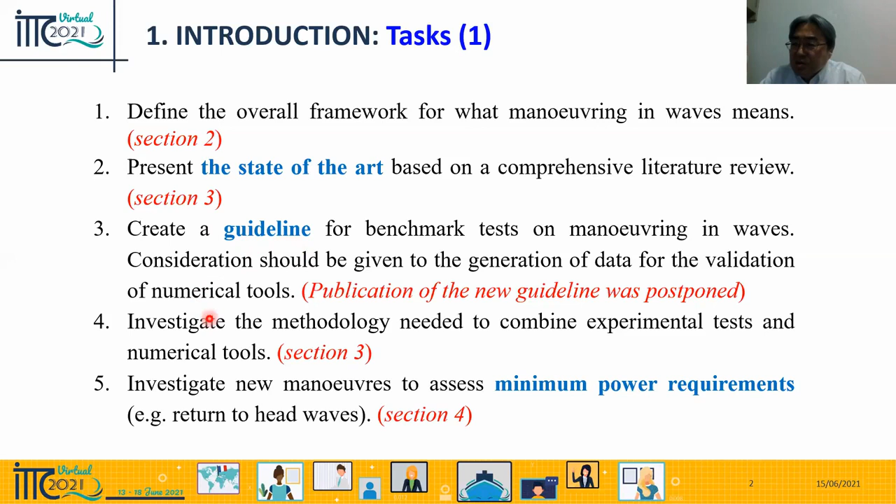This time I'd like to talk about some keywords. The second keyword is the state of the art, the third is guideline, and the fifth and sixth relate to finding the minimum power requirement. Tasks 7 and 8 are also related to the minimum power requirement. So this time I'd like to talk about the achievements on the task of minimum power requirement and some state of the art.

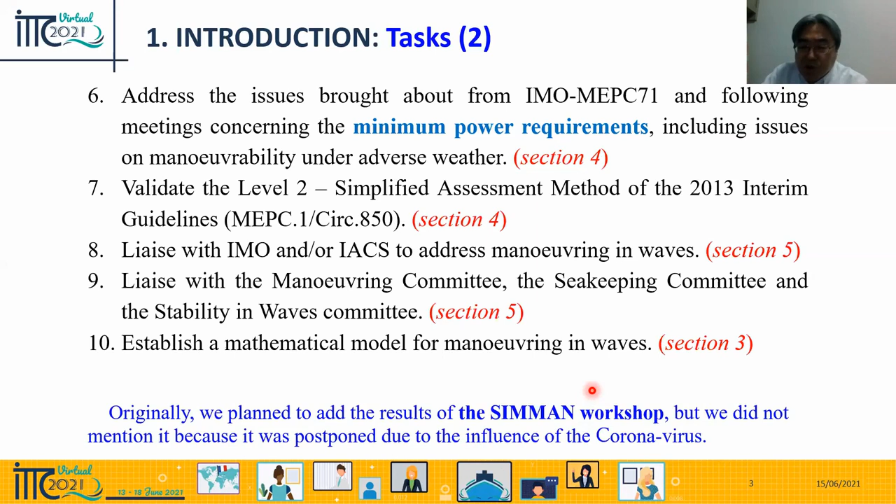Originally, we planned to add the results of the SIMMAN workshop, but we did not mention it because it was postponed due to the influence of the coronavirus. So this time my main topics are: state of the art, minimum engine power, and conclusion and recommendation.

Okay, the first one is the state of the art. In the report, we can find five subsections. First is the experimental method, second is numerical method, third is steady sailing performance and maneuvering limit in wind and waves, fourth is wave effect on ship maneuvering in shallow water, and fifth is additional aspects of maneuvering simulation in waves.

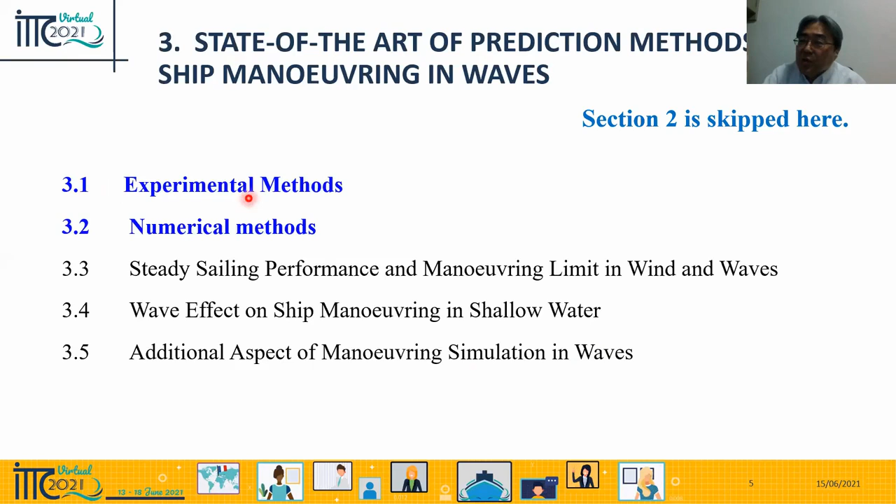Here I would like to introduce the first one, the experimental method, and the numerical method. In an experimental method, there are two types. One is a free running test in the waves. The other one is a captive test in the waves to capture the hydrodynamic force characteristics acting on the ship model.

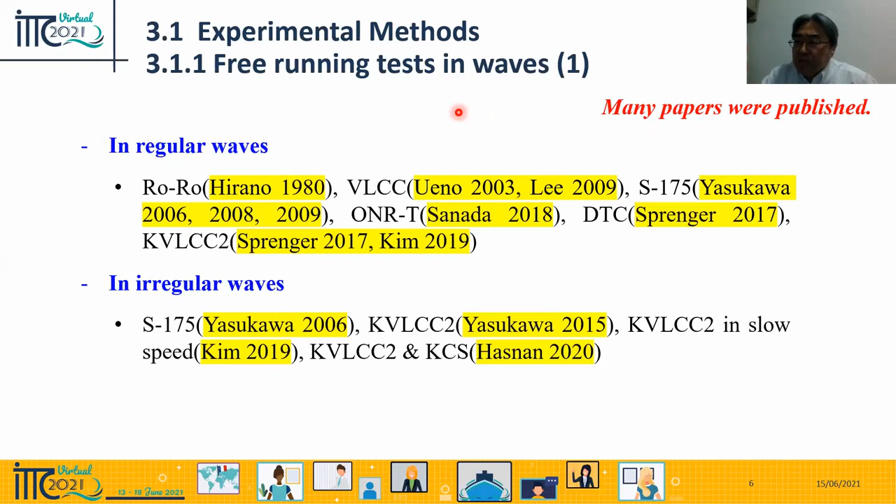Some ships published papers about the free running test in the waves, not only in regular waves but also in irregular waves. Nowadays many papers have been published. Here I would like to introduce a special technique for measurement of the ship position.

That is a total station system. The total station system is a fully wireless system for position measurement applying optical technique. You can see this is a photograph of the camera of the total station. The camera part is here, like the head of a human, and this one has one eye - this is the eye. Using this camera, the system always watches the target.

This target is the prism, installed on the ship model. The camera of the total station can track this target position automatically from the tank side. This drawing shows not a ship model but an actual boat - it shows the situation of measuring water depth in a river. Total station systems originally come from the civil engineering field.

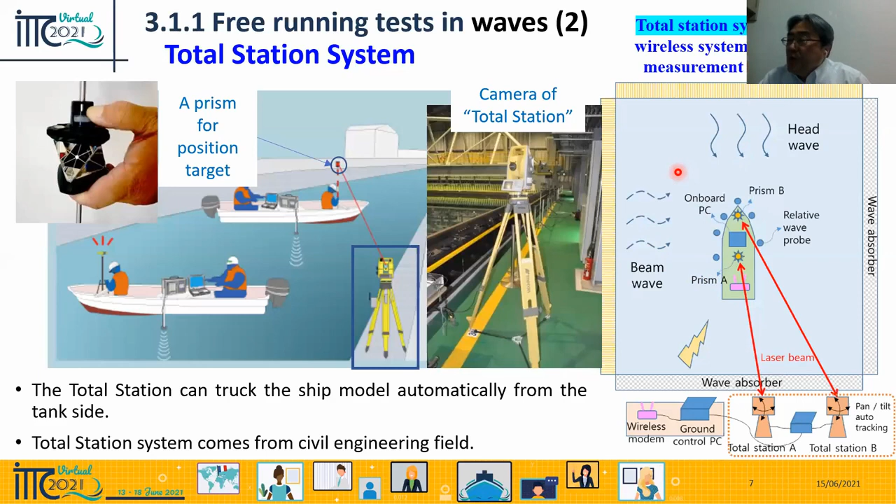This is a result showing the turning trajectories in regular waves. You can see many lines. The first one is turning with rudder angle 35 degrees, wave height is 2% of ship length, and wave direction is here, with the ship moving from here in this direction. This position is the 0,0 origin.

It just starts the steering, and at the same time the turning starts. This is the trajectory in calm water, reaching the steady state turning situation. Then wave comes here, so this is the trajectory in the waves - some deformation occurs, and you can see the ship moving here.

This is the trajectory in regular waves with lambda by L equal to 1.0, where lambda is the wave length and L is the ship length. The wave direction is here, but during the turning the drifting direction differs, so the directions are different. You can see the broken orange colored line. This is also the trajectory in case of lambda by L equal 0.7, and the green line shows the results for lambda by L equal 0.5.

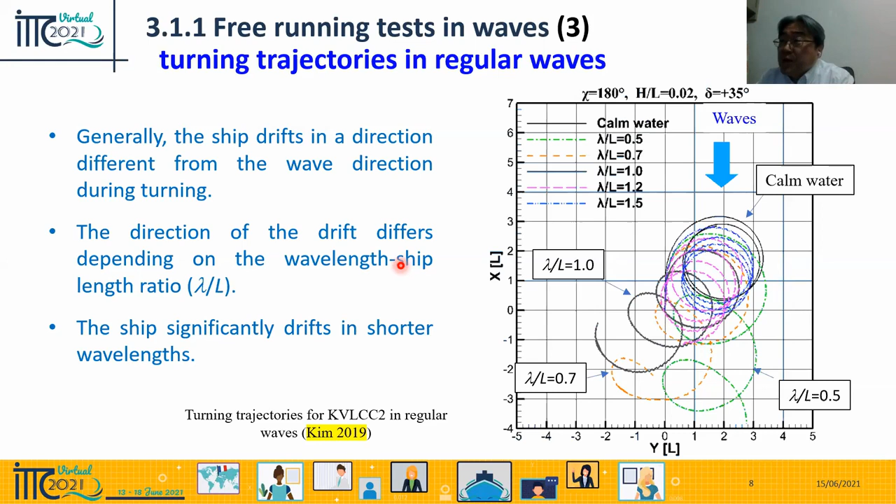Generally, the ship drifts in a direction different from the wave direction during turning. The direction of drift differs depending on the wave length to ship length ratio. Lambda by L of 1.0 is here, 0.7 is here, and 0.5 is here. The drifting direction is closer to the wave direction in shorter wave lengths, and the ship significantly drifts in shorter wave lengths. This drifting distance is quite large compared to the case of lambda by L of 1. This is a really typical characteristic of ship turning in waves.

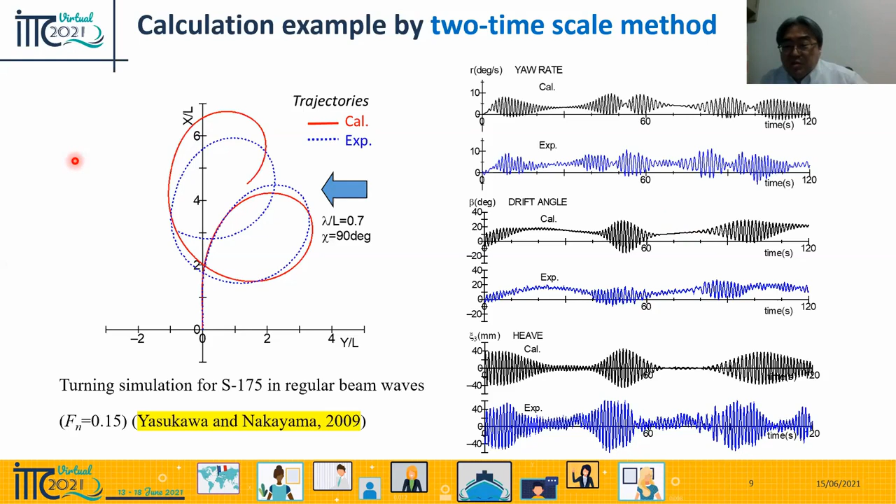Next, I would like to introduce the outline of the 2-time scale method. This method is really convenient, and the computational time is short while accuracy is not so bad. This method was presented by Skejic and Faltinsen in 2008, and at the same time Yasukawa and Nakayama also presented a similar approach.

In this method, total ship motion—meaning maneuvering in waves—is expressed as a combination of low frequency maneuvering motion and high frequency wave-induced motion. These two models, low frequency motion and high frequency motion, are separately solved. For the low frequency maneuvering model, we use the MMG maneuvering model with mean wave forces. For the seakeeping model, we normally use the time domain strip method or time domain 3D panel method. The two models are solved separately, but information exchange is really important between the low frequency and high frequency models.

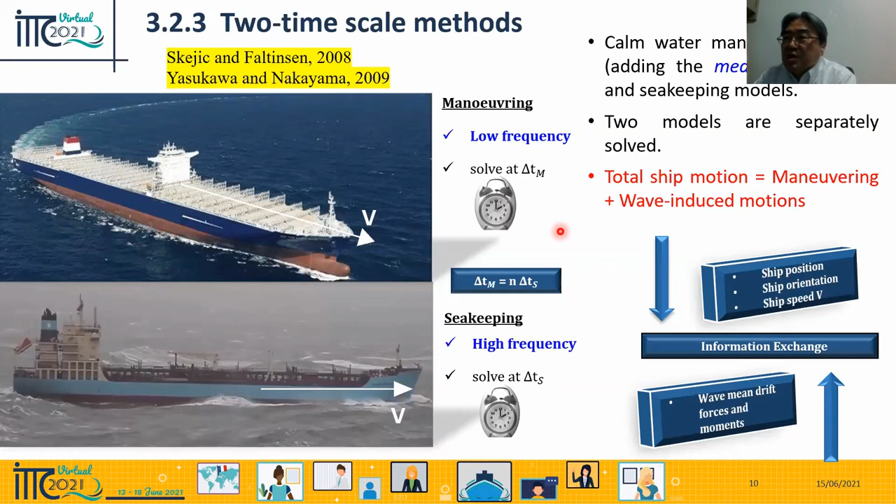Next, let's move to the experimental method. This time I would like to introduce the wave-induced motion and mean wave forces of a ship moving obliquely in regular waves. The important point is that the ship is moving obliquely—if the ship moves straight, that's the usual seakeeping problem. This experiment was conducted by Yasukawa and Adnun in 2006. I'd like to introduce some results about the wave-induced motions: heave, pitch, sway, and roll.

In the head wave case, heave and pitch at 0 degrees are completely the same as the usual seakeeping problem, with the horizontal axis being lambda by L for regular wave cases. Taking drift angles of 5 degrees and 10 degrees, this drift angle effect is not so remarkable in heave and pitch. But in sway and roll, at 0 drift angle the amplitude should be 0, and in the experiments it's almost 0. But taking drift angles of 5 to 10 degrees, sway and roll—such lateral motion—appears.

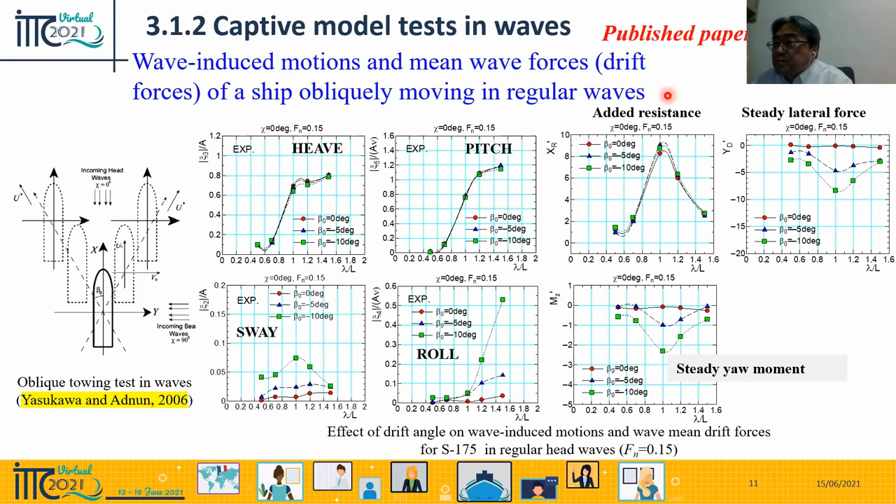So this time I introduced the two-time scale method, but this method is based on linear theory, meaning the wave height is small. Nowadays, however, CFD has become a really powerful tool for simulating everything.

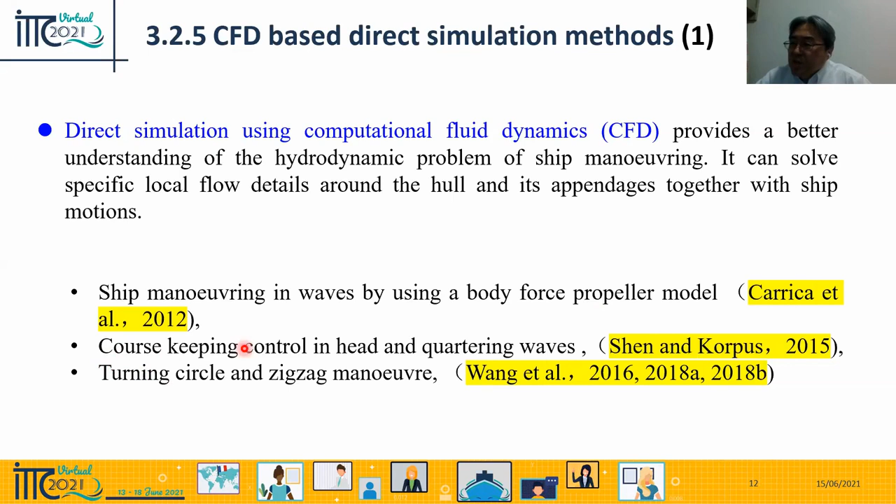For maneuvering in waves cases, CFD is really important, and direct simulation using CFD is really promising. In 2012, some simulations were carried out, and now this is being extended to problems of course keeping control, turning circle, and zigzag maneuvers. This is the result from Wang et al.

This 2018 result is a simulation of turning in regular waves. We can clearly capture the free surface elevation during turning here, and at the same time check the vortical structure around the ship during the turning. I think this method is really promising for the near future.

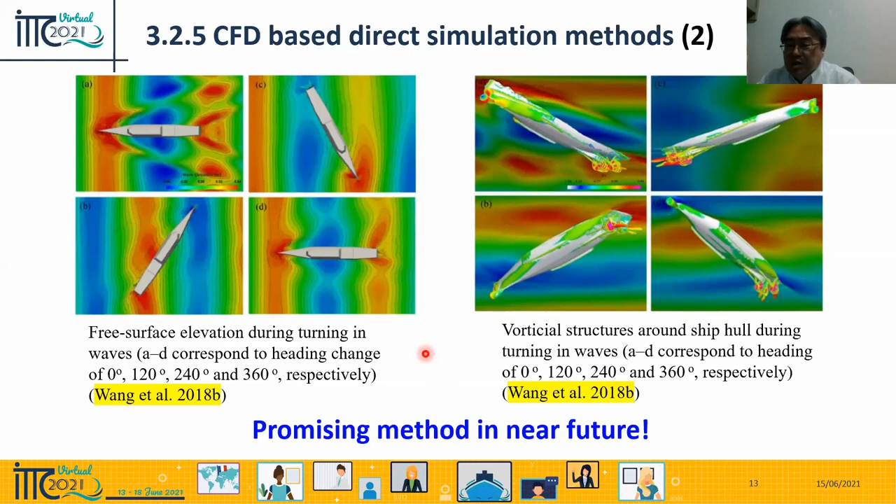Okay, next move to the minimum power requirement problem.

Background: IMO adopted the Energy Efficiency Design Index for new ships to reduce shipping greenhouse gas emissions via improved ship design and operation. There was a concern that one of the most effective ways of reducing the EEDI is simply by choosing a smaller main engine, thus reducing the ship's design speed. Within IMO, a debate took place on how far speed reduction could be used to attain a low level of EEDI. As a result, it was decided to limit the use of this method so that it does not lead to unsafe and underpowered ships that may lose maneuvering capability under adverse weather conditions.

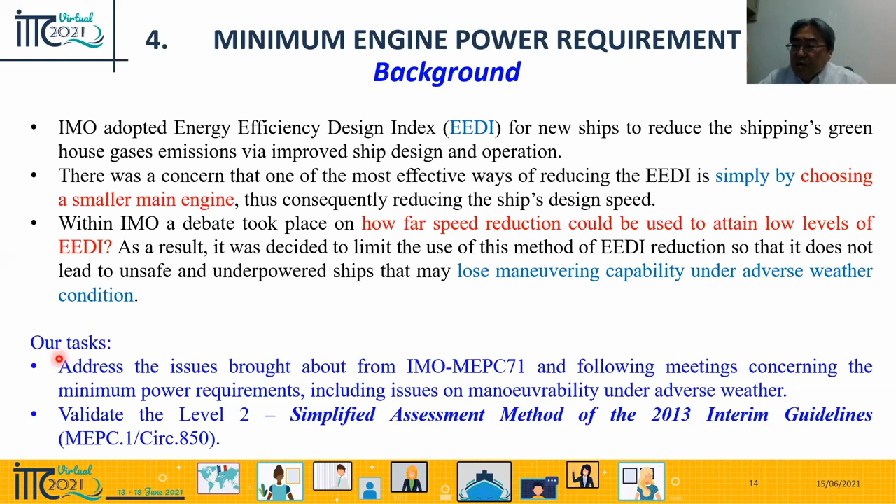Under that background, we were given this task. So in this I will introduce some results, but unfortunately there's not enough time, so I'll just mention the problem.

Revision of the 2013 interim guideline: for determining minimum propulsion power, there are two methods. One is Level 1, using a really simple formula. The other is Level 2, sometimes called the simplified assessment. This Level 2 method is really important now.

The name includes the word 'simplified,' but it's not so simple, because first we have to define the adverse weather condition and also define the advance speed. After defining that condition, we have to calculate the resistance — calm water resistance, aerodynamic resistance, added resistance in waves, and appendage resistance. After fixing the resistance, based on such data, we can calculate the engine power.

Then there's the required advance coefficient. If we want the advance coefficient, we need self-propulsion factors — thrust deduction, wake fraction. Using such data, we can calculate the power.

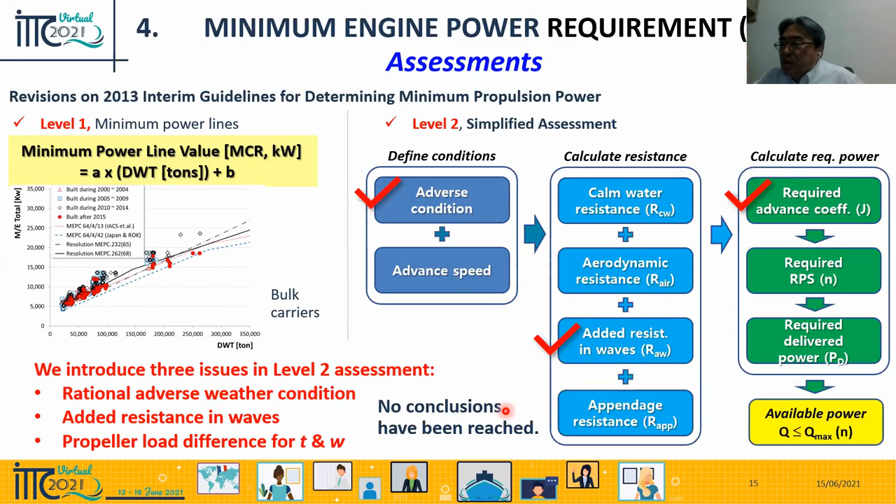Then there's the self-propulsion factor — how should we determine it? There is this kind of problem, but at present no conclusion has been reached.

Unfortunately time is limited, so just to show the slide about prediction methods of ship maneuvering in waves: we should move to more experiments and calculations in irregular waves with large wave height. Direct ship simulation is promising, but direct maneuvering simulation in irregular waves is still a challenging problem.

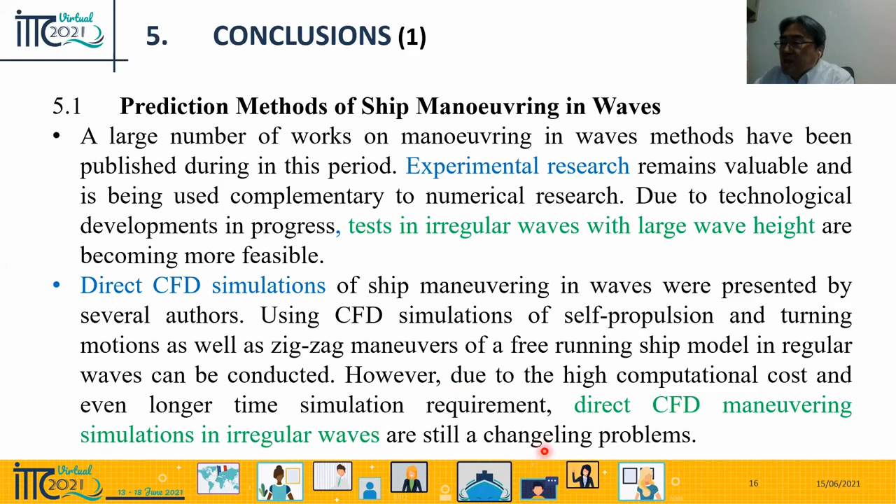Minimum engine power requirement discussion is continuing in IMO. The recommendation is to improve the numerical method; we need better understanding of the mean wave drift forces.

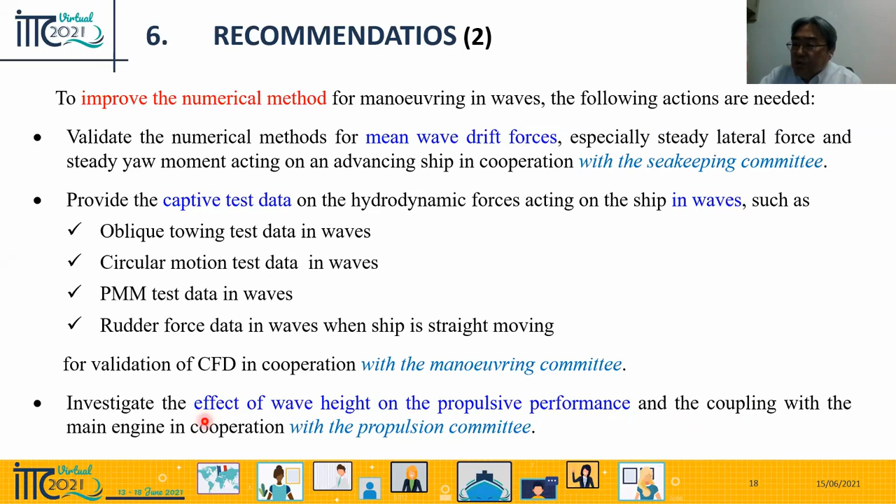Cooperation with the seakeeping committee is really important. We should provide captive test data for validation with CFD, such as oblique towing tests in waves, circular motion tests in waves, PMM tests in waves, and so on. We should also investigate the effect of wave height on the propulsive performance, coupled with the main engine, in cooperation with the propulsion committee.

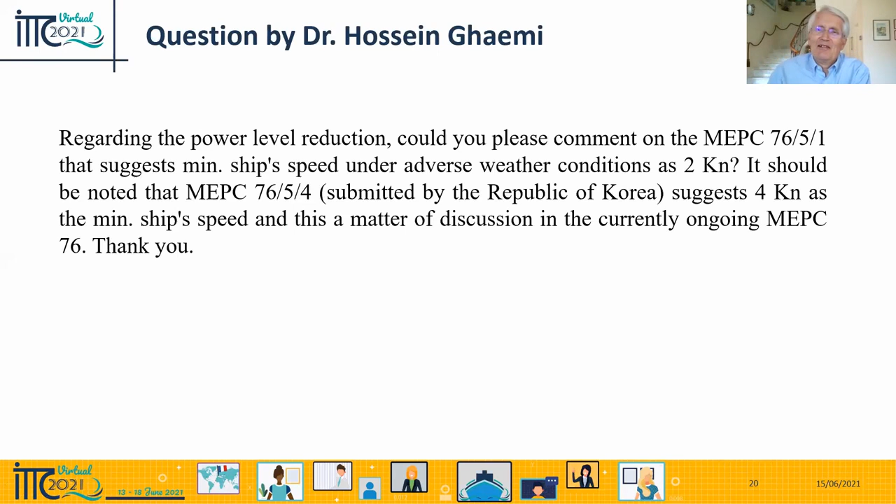There's one question that came up earlier from Hossein Ghaemi regarding the power level reduction. Could you please comment on the MEPC submission that suggests the speed under adverse weather conditions at 2 knots? There is also a submission from Korea suggesting 4 knots as a minimum ship speed. This discussion is currently ongoing in MEPC, but according to my experience, it could be 0 even in adverse conditions. But for calculation, you have to define something. So what do you say to that?

Okay, thank you for the discussion. In MEPC 76/5/1, the revised draft guidelines were discussed under reinforced adverse weather criteria — wave height 6 meters, wind velocity 22.6 meters per second, with a ship speed of 2 knots proposed. However, the UK and the Republic of Korea prefer the more conservative approach of a ship speed of 4 knots on this issue.

In MEPC 76/5/4, Korea concluded that when the revised draft guidelines are used, a lower required minimum power could be derived, as shown in Figure 1. This figure shows the change in required propulsion power.

So this bar graph shows the results using the 2 knot case. The order of magnitude is slightly different because the self-propulsion factor is different. This result is for 4 knot. In the case of 4 knot, minimum power is increasing, meaning there exists a bigger margin in the engine. In the case of 2 knot, the minimum power should be smaller.

In view of safe ship navigation, a larger minimum power is better, so in that opinion 4 knot may be better. But in view of reducing CO2, a smaller engine is better, in which case we should choose 2 knot.

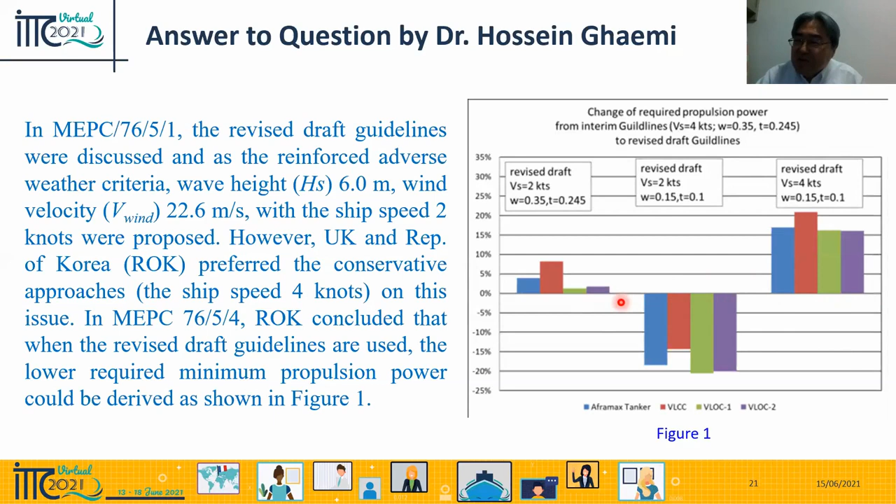So this suitable line is very difficult to determine. The ship speed under the adverse weather condition, whether 2 or 4 knot, is not fixed yet. It is scheduled to be discussed at the ongoing MEPC meeting.

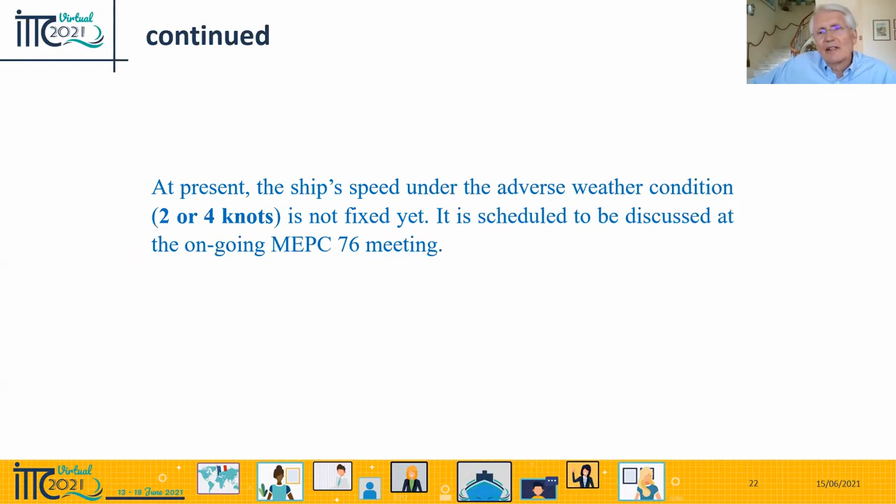That's a conventional maneuvering model such as Abkowitz or MMG models are for calm water assumption. Most of the existing models are based on such models and extended to waves by adding second order mean drift force and moments, as you showed in your presentation, due to waves. He would like to ask you how accurate you think such an approach is. That's one question. And do you think it's possible to develop a more thorough mathematical model, including wave and seakeeping components in the maneuvering model?

Okay, thank you. Low frequency maneuvering in waves can be predicted with practical accuracy by a simple treatment: adding the second order drift forces acting on the ship to the maneuvering simulation force model in calm water. This may seem surprising, but the rationality of such handling has been theoretically proven on the assumption that the wave height is low, ship speed is slow, and the ship is slender.

On the other hand, it is difficult to grasp ship maneuvering in large waves, which is important for discussing navigation safety, by theoretical prediction. For the prediction in such a situation, it may be promising to use a method based on CFD. That is our answer about the first question. It won't be so easy with CFD to include all this.

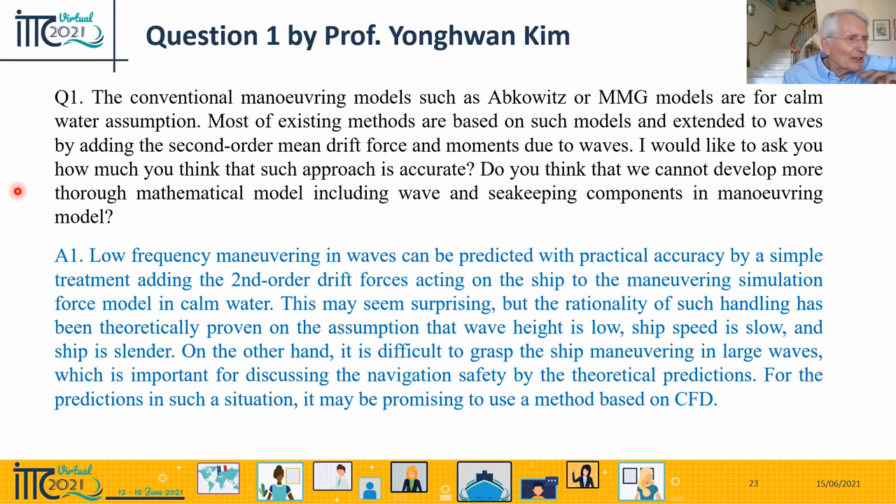The next question from Professor Kim was: you pointed out very precisely that turning trajectories in waves are dependent on wave conditions such as wavelength and amplitude, even in regular waves. Now in case of irregular waves, he's sure the trajectory is dependent on wave generation parameters, including the number of wave components, phase differences or seeds of wave components, and so on. For example, the trajectories can be different for different wave seeds. Then we need to have a consensus on a general definition to define the trajectories in irregular waves. Do you have any comment on that?

Okay, so the answer is: the only way to rationally capture the motion characteristics of a ship in irregular waves is to repeat free running tests changing the seed. We think the seakeeping committee is discussing how to handle ship motion in irregular waves.

On the other hand, for turning in irregular waves, the effect of the slowly varying second order wave forces seems to be small. In such a case, it is useful to repeat the turning test in irregular waves with different seeds. Based on the test results, we can obtain turning indices such as advance and tactical diameter in irregular waves, and take the average and standard deviation based on those. In such a way, it is possible to capture the turning characteristics in irregular waves.

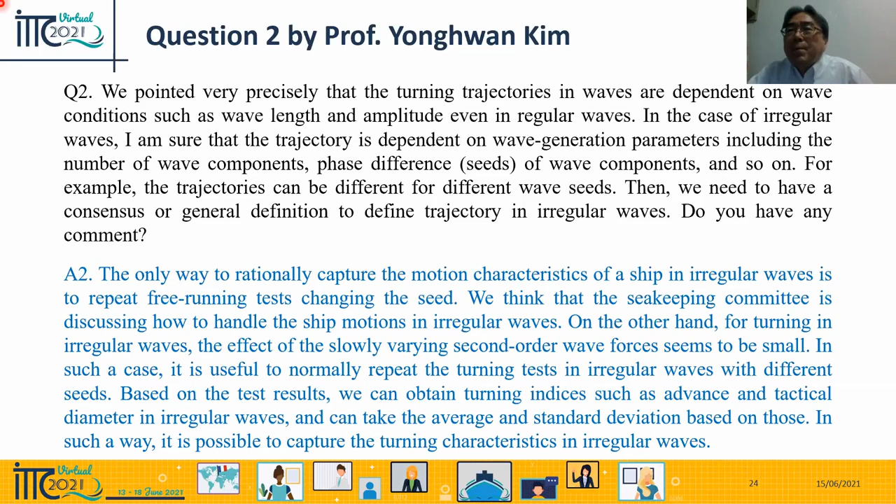Thank you, and there was one more question. According to his experience in adverse ocean environments, the seakeeping component due to heavy waves can play a role in ship maneuverability. The ship can have large motion, varying displacement and velocity in harsh environments, and these can significantly influence ship maneuvering. If so, just adding the second order mean forces due to seakeeping in the maneuvering equations is not enough, and you have to include instantaneous seakeeping components in the ship maneuvering simulation.

And my personal experience is that you can even have the propeller getting out of the water. So how do you calculate that? Okay, thank you, do you have any comment on that?

Yeah, calculation methods based on the concept of the two-time scale method cannot accurately predict ship motion in large waves, because the usual two-time scale method is based on small waves. So we think CFD-based direct methods are promising. Yeah, that is my answer.

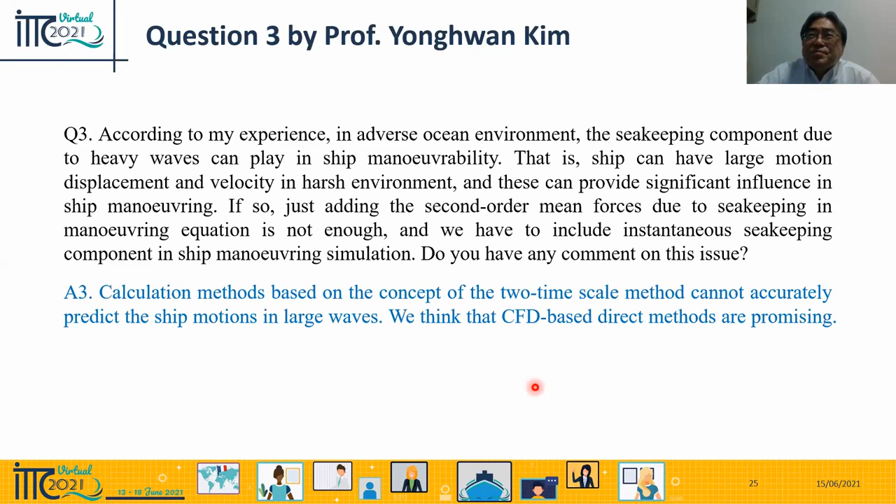So, no way. Experiment is better. Okay, experiment is better.